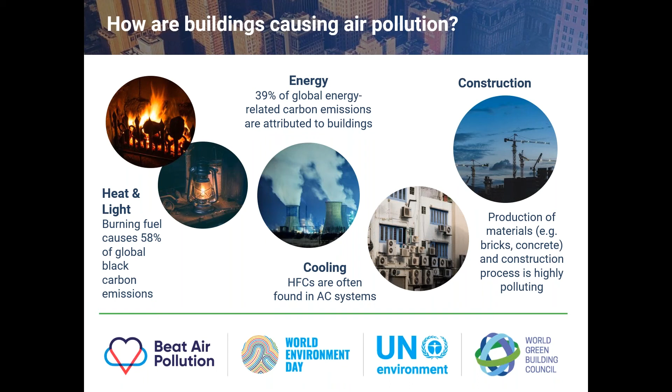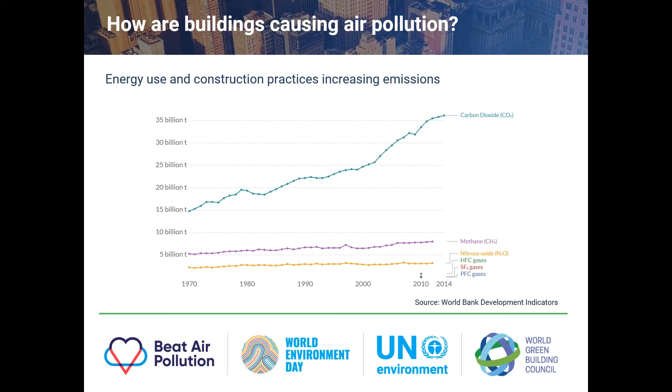Now, these are just some sources of air pollution, but the sources are causing the following effects. Firstly, increasing emissions from building energy use and construction. And the International Energy Agency have flagged that emissions from buildings are not on track to reach a reduction in emissions target, and that emissions from the sector are actually creeping to an all-time high, likely due to extremes of weather and global population growth. Secondly, this pollution has a human impact. The World Health Organization reports that 9 out of 10 of us do not breathe safe air. And as a result, this air pollution was responsible for 7 million premature deaths in 2016.

And to add to this challenge, this quote from the President and CEO of the World Resources Institute, Dr. Andrew Steer, reminds us that curbing emissions and pollution from buildings is a test that is really ever increasing. As a building lifespan is typically 50 to 100 years, what we're risking is locking in emissions for the next century with poor building design and construction today. This is obviously a particular risk in parts of the world that are experiencing massive population growth.

Now, this challenge is something that we as the World Green Building Council are looking to grow awareness of through the World Green Building Council's World Green Building Week campaign, titled Building Life, which we're launching today on World Environment Day. So taking place from the 23rd to the 29th of September this year, World Green Building Week is our annual campaign that seeks to raise awareness of green buildings as one of the effective ways to tackle sustainability issues. The campaign aims to raise greater awareness of emissions from all stages of a building's life cycle, and therefore encouraging new practices towards reducing emissions from buildings and therefore improving our air quality.

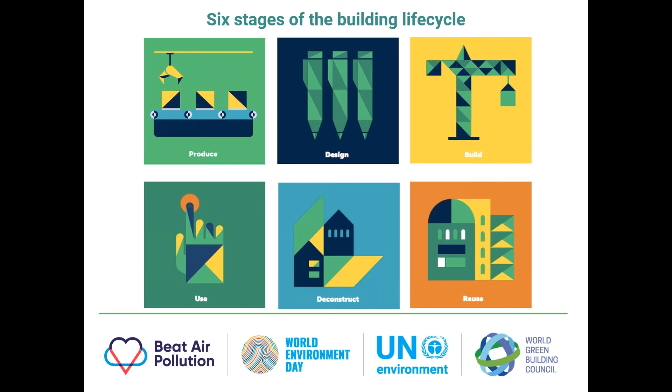The Building Life campaign is focusing on 6 areas of a building's life cycle: production, design, build, use, deconstruct and reuse. And throughout the campaign, we're going to be working closely with product manufacturers to seek out ways to source, produce and transport materials more sustainably.

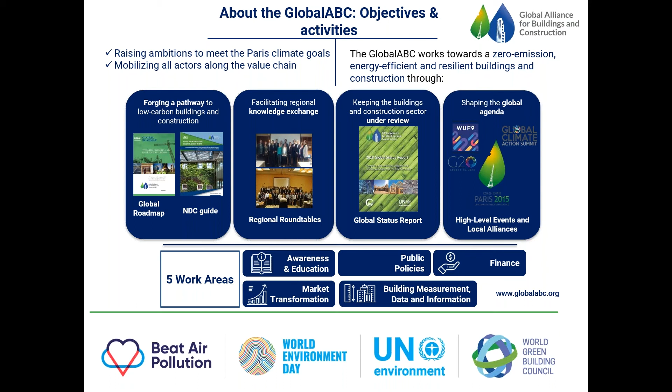In a nutshell, we work towards a zero emission, efficient and resilient buildings and construction sector through forging global and regional pathways to decarbonization, working with nationally determined contributions with countries, facilitating knowledge and best practice exchange, targeting policymakers, especially through our regional roundtables, and through keeping the sector under review with our global status report. The next one is launched at COP25, so do stay tuned, and through shaping the global agenda. We have 120 members, among which are 27 countries. If you're interested in joining, please do feel free to reach out.

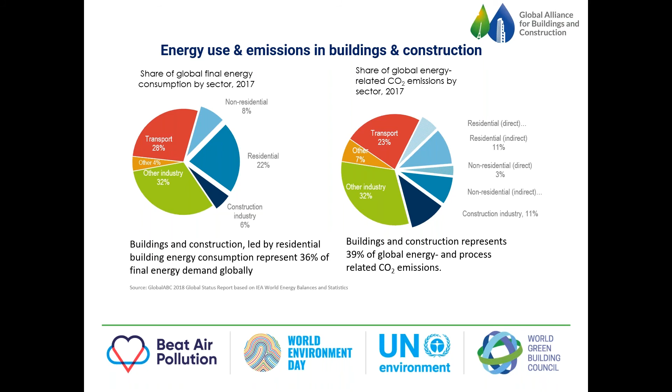As Katrina has already mentioned, the buildings and construction sector impacts are huge, and we see 36% of global final energy demand and around 39% of global energy and process-related emissions. It is estimated that it is not possible to achieve the climate agreement goals without decarbonizing this sector. And in that context, it is particularly heartening to see cities like New York taking actions of doing that.

A couple of words about the emissions profile of the city. So New York City currently is at 51.7 million tons of CO2, and the majority of which can be attributed to the buildings and construction sector, which is why it's such a particularly important sector. So we see 30% for transportation, and if we then look into buildings, fossil fuels account for around 40% and building electricity for 25%. New York City essentially has set two goals that I would like to talk to you a little bit more about.

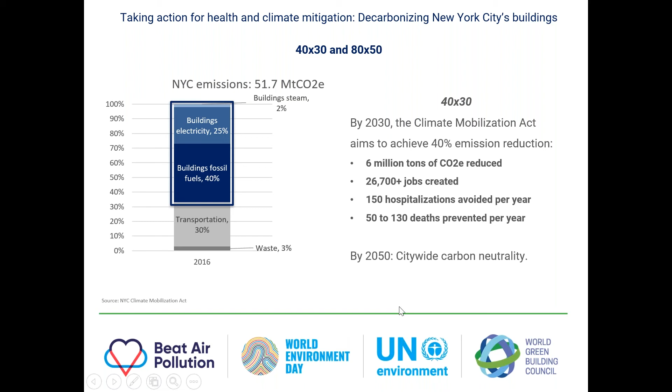We call it here 40 times 30 and 80 times 50, or 40 by 30 and 80 by 50. What is meant by that is 40% reduction by 2030 and 80% reduction by 2050. For the latter one, 80 by 50, they've actually pushed further than that now and are aiming for citywide carbon neutrality by 2050. New York City is estimating with this goal that 6 million tons of CO2 equivalent will be reduced, around 27,000 jobs created, 150 hospitalizations avoided, and around 100 deaths prevented per year. So also here, strong connections to health.

A little bit more about the measures for decarbonizing the buildings and construction sectors. I'd like to divide them into 5 pillars, but this is our assessment. This kind of division is not necessarily from the city itself. It's just to increase understandability.

Firstly, there are measures around green and solar PV roofs. So new construction and substantial renovations are required to install solar PV, green roofs, or both. Then there is also an energy efficiency grade similar to the hygiene grade.

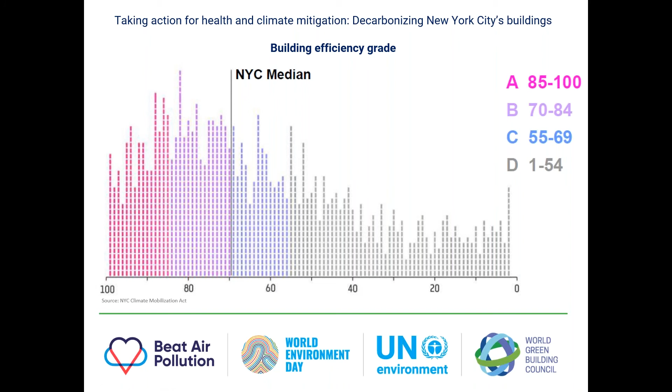For those of you who know the US and who've been to New York City, in restaurants, you see the grades between A to D, depending on how hygienic it is there. So the idea would be to do something similar for buildings. And this is what it would look like. You can see on the left side the buildings qualifying for A, and on the right side those who would be D, and that is based on the Energy Star labeling.

Another 2 pillars relate to energy efficiency loans, and New York City has included PACE financing for energy efficiency and renewable energy projects with long-term and little or no money down. This type of financing rests with the property, so the loan does not rest with the person, the individual, which decreases risk for the individual.

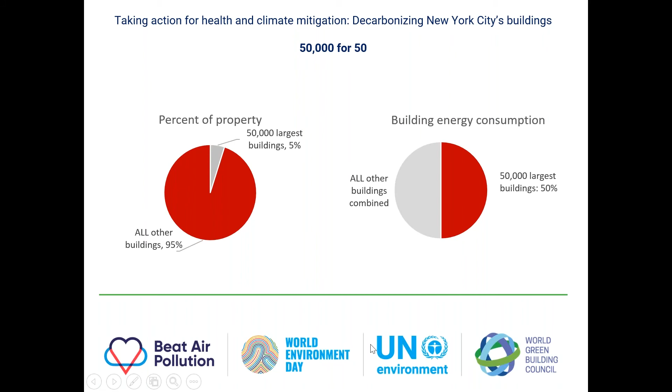And then there is a pillar that I like to call 50,000 for 50, and that targets the high emitting buildings, so the really large buildings that are larger than 25,000 square feet in size, and they must meet emission thresholds starting in 2024. So why target those buildings? I think this is a very interesting measure that New York City has taken. Those buildings only represent about 5% of properties in the city, but if you look at their energy consumption, they represent 50%. So in a way, you could say it is a hotspot approach.

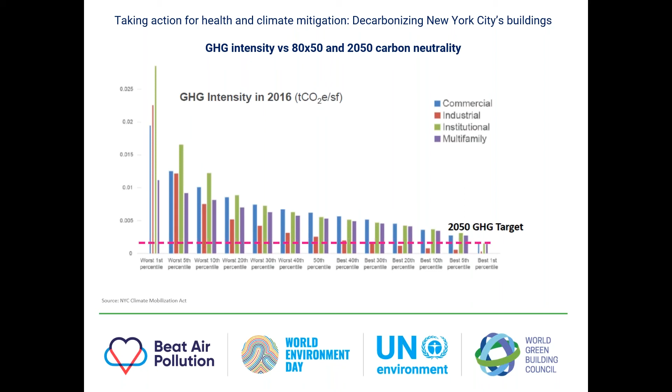This is just to give you an overview to compare the 2050 target with the current emissions intensity in 2016. And what you can see here is that currently only the very best percentile on the far right side would meet that target, which highlights the importance of setting such targets and the ambitions and the strong measures that are required.

That's a little bit also addressing the split incentive, a carbon trading scheme, city operations emission reductions of 40% by 2025 and 50% by 2030, and NYCHA properties, that's the New York City Housing Authority properties, need to meet emission reduction of 40% by 2030.

There's also a whole range of measures around a greenhouse gas emission budget approach, where architects and engineers calculate this budget and report emissions accordingly, and those buildings who exceed their budget are then fined. Affordable housing has more time to comply with this measure to ensure that any measures taken do not decrease affordability.

At the same time, there are also measures in place because it is recognized that energy efficiency is especially important for those with lower means. And those measures include things such as repairing heating system leaks, insulation, and installing and upgrading ventilation and lighting systems, as well as weatherization.

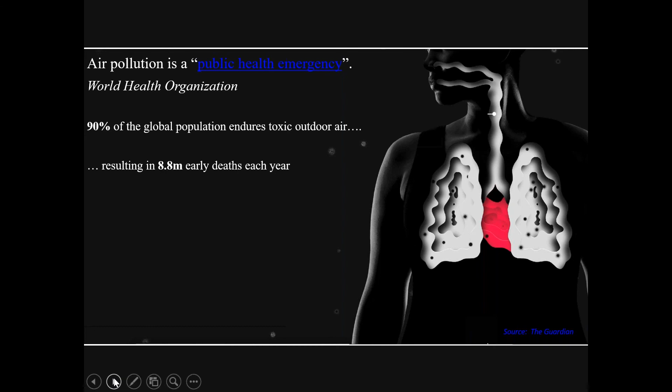Some of the stats here, just as a quick summary for the listeners, hopefully all familiar with, but 90% of the global population is exposed to some of the pollutants we're talking about today, resulting in just under 9 million early deaths each year. There's a new report, really just a summation of a number of reports that came out several weeks ago, looking at how outdoor pollutants affect pretty much every organ within the body.

And this is fairly commonsensical when we take a step back, especially when it comes to particulate matter, where, for those who are familiar with PM 2.5, these are harmful particles that enter directly into the bloodstream and then get distributed to every organ within the body. And so without going into huge depth here, just pointing out the main ones, lungs and heart being the obvious ones, leading to asthma, lung cancer, and heart disease.

Beyond that, brain and mind, leading to stroke, dementia, reduced intelligence, eye problems, skin aging, and the list goes on, pun intended. Looking at abdominal organs, there's kidney cancer, bladder cancer, diabetes, Crohn's disease, fatty liver disease. And finally, although the response here is a little bit slow, just keep moving that forward.

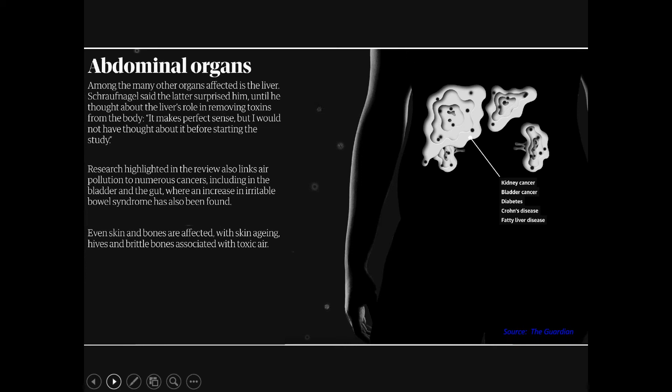Finally, looking at reproduction and the effect on babies and children, which is probably the most significant, given children are still at the development stage, and given their air to body mass ratio are by far most affected. But reduced fertility, miscarriages, and low birth weight are very, very common in places like China and India.

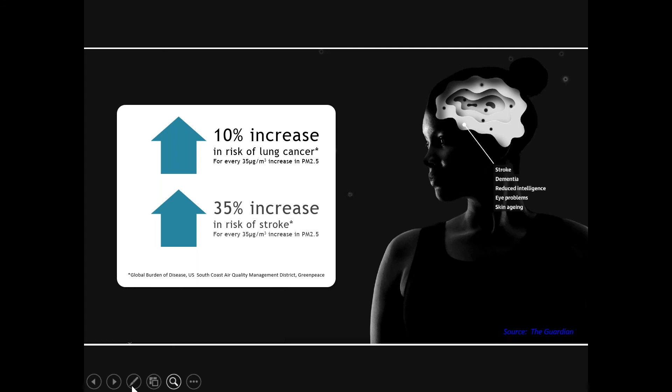And then also looking here at effects on other geographies, and highlighting the fact that these minor changes in air quality, again, because we're breathing so much air per day, minor lifts like a small change of 35 micrograms per cubic meter, which are a fairly common occurrence in cities like New York, have, again, significant impact. So 10% increase in risk of lung cancer and 35% increase in risk of stroke. These are very, very significant figures for cities such as New York.

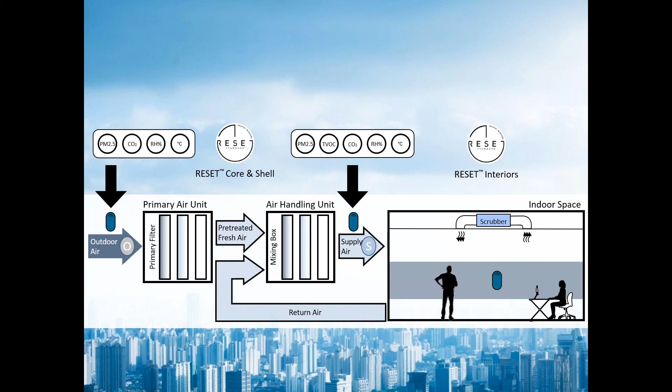Then just wrapping up and setting the stage for our two case studies. On the RESET side, the participating projects track outdoor air quality, air being delivered by mechanical systems into tenant spaces, and then finally the air being breathed by tenants. And this gives us a wealth of insights on what's actually happening within buildings as compared to outside, and the various challenges that are at play here, which is what our two case studies will be diving into. And this particular graph here is a little bit heady, but work with me.

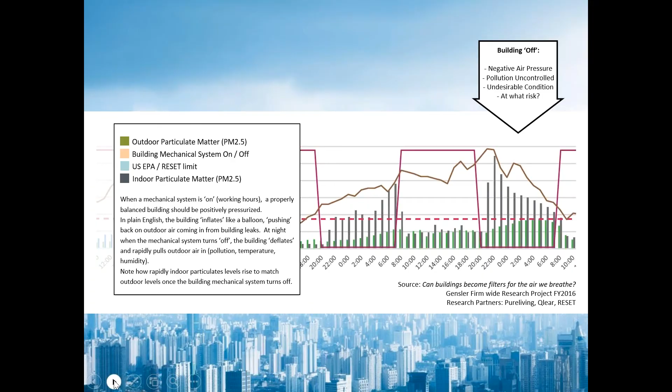So far, we talked about outdoor air pollution and ways to reduce it. But what about indoor air quality? The fact is that most of us spend about 90% of our time indoors. That's a staggering 22 hours per day. And the majority of our exposure to outside air pollution actually happens inside our buildings. So I will be focusing my talk on the 90%.

The traditional approach to maintain indoor air quality in buildings is to bring outside air to dilute indoor pollutants, such as carbon dioxide from people or formaldehyde from building furniture. However, when you bring outside air, you need to condition it, meaning that you need to spend more cooling and heating energy. In its turn, spending energy will lead to higher outdoor emissions, and you will be contaminating your building even further with outdoor pollution. This is a vicious cycle, and clearly it means that buildings should not depend on outside air as a solution to acceptable indoor air quality.

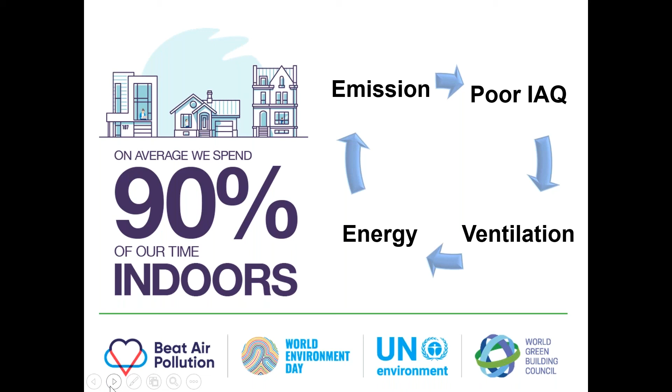Instead, buildings must adopt strategies to maintain indoor air quality and not spend more energy. Even better if they can find strategies that can maintain indoor air quality while lowering energy consumption. The solution I'm presenting here does exactly that. HVAC load reduction, or HLR, is an intelligent modular scrubber that includes sorbent materials. So during normal operation of the building, the HLR will clean a fraction of the return air from gaseous pollutants, and then it puts it back into the return air stream.

And in addition, this module is equipped with sensing capabilities to actively monitor return air quality. So as a result of cleaning return air, the building can dramatically reduce outside air requirements, therefore saving energy and keeping the pollutants generated outdoors on the outside and keeping indoor air quality below acceptable levels.

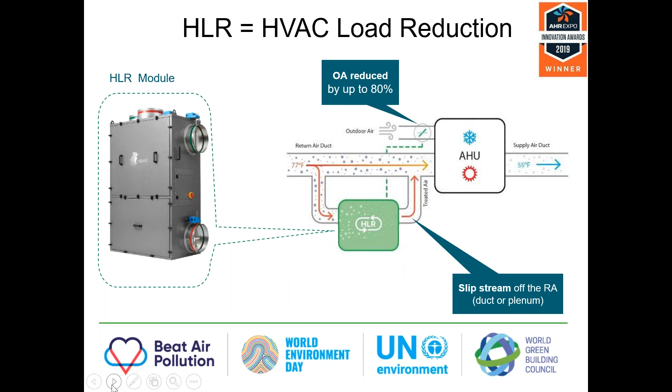So the client approached us with 2 main goals. The first goal is energy efficiency, of reducing energy emissions by 15%. The second goal, equally important, is to reduce the flow of outside air pollution indoors and actively monitor and manage the air quality inside the building.

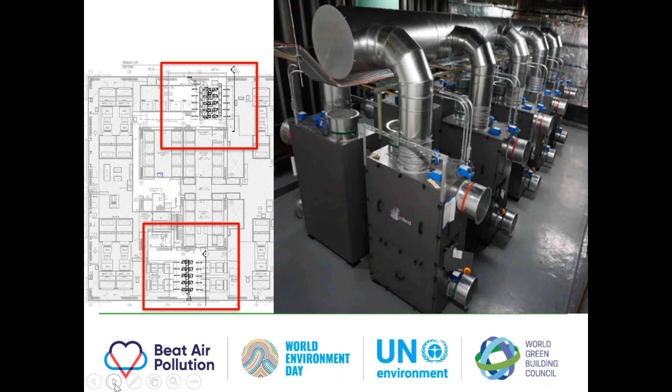So the retrofit consisted of installing 40 HLR modules in the building mechanical rooms. A slipstream, or a bypass, of return air from the plenum is drawn through the HLR modules to be cleaned before it gets distributed to the rest of the floors. The pictures I put here on the slide show an example of the installation on the 7th floor. You see a cluster of 20 HLR modules, 10 on the north and 10 on the south side. And the 28th floor has an equal number of 20 HLRs, so a total of 40 HLR modules.

These modules are connected to the building management system, and after installation, we determined the new minimum outdoor air position that we can operate the building at. And also after installation, we performed outside air quality and indoor air quality measurements, and then energy measurements to compare the building's results before and after this retrofit.

I will start with the indoor air quality results. We have here a chart showing ozone concentrations measured during August of 2018. The left axis is ozone in parts per billion, and the x-axis represents the date. The red line shows outdoor ozone concentration measured on Times Square. These concentrations were very high and reached a high value of 90 parts per billion. This is 1.3 times higher than the outdoor limit.

The blue line shows indoor ozone concentration before we did the retrofit, meaning that the building was still bringing a lot of outside air. And you can see that the blue line, indoor concentration before the retrofit, tracked very closely the outdoor concentration shown in red. Around 50% of outdoor ozone was brought inside. Think about this. This is actually pollution you introduce from the outside to the inside.

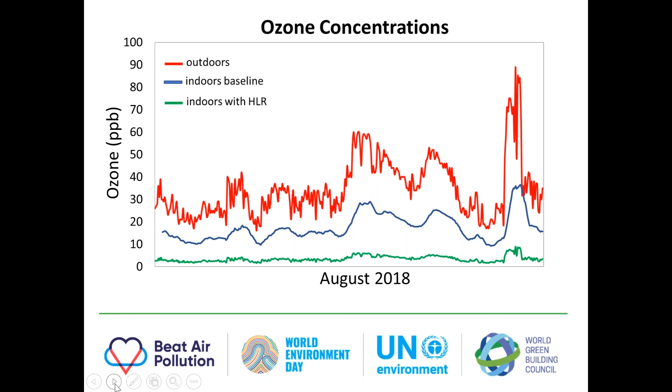Now the green line shows indoor ozone concentration after the retrofit, after we closed the outside damper to a minimum and we operated the HLRs. And you can see that the indoor ozone values were less than 10 parts per billion, and this is a major improvement over the baseline, considering that ozone is one of the pollutants, similar to particulate matter that Rafer mentioned, that has no indoor limit. The lower, the better.

So moving to the energy results. By making this retrofit and installing the HLR modules, we reduced outside air 80%. As a result, the building saved 500 megawatt hours of cooling and dehumidification of the outside air, and 4,700 million BTUs for heating the outside air. This led to $413,000 savings in utility bills, including $10,000 in steam energy bill, basically. Also, the building obtained very healthy rebates from Con Edison. And by reducing the conditioning of outside air, the building saved a remarkable 1,361 metric tons of carbon dioxide.

This is my last slide. I put a headline from the New York Times, published in April 2019. I know Nora talked in detail about the Climate Mobilization Act. I want to put it again and say that New York City became the first city in the world to constrain large building emissions through hard limits. People are saying that this bill is similar to the Green New Deal for New York, and it will be the largest disruption in the history of New York City real estate.

So buildings need to do deep energy retrofits, and if the owner is not in compliance, they need to pay a fine, and it will be an ongoing fine based on their actual emissions versus the cap. So to put things into perspective, the Bank of America Tower, located on Bryant Park, which was actually the first building to achieve Platinum LEED certification in New York, will need to pay $2.5 million in fines in 2024 if they don't reduce their emissions. With that, thank you so much.

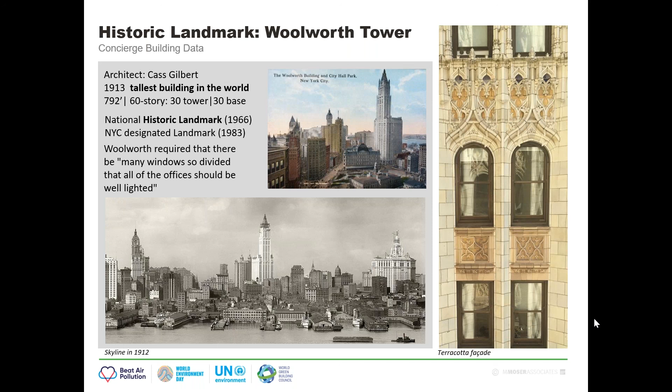their natural daylight. Are we moving forward here, the slides? There we go.

And you can actually see in these pictures here, we're revitalizing this historic Woolworth Tower. We were able to take advantage of that opportunity to have light by using daylight controls and reducing energy use through maximizing the natural light that comes into the space. And there are many ways that we did this, but sensors is one way that we reduced energy load.

And we're going to be talking more about this at the end of this talk, but by reducing our energy load in multiple ways through our design integration, we can make a big difference, which not only saves money, but also really can help the air and the carbon outside in New York City.

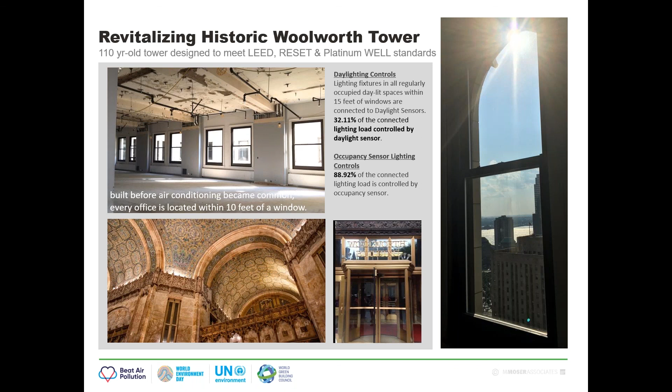So beyond revitalizing, there has been a lot of redevelopment work on the Woolworth building. And we won't go into all of the details because it's been going on for over 100 years. But as a landmark building, New York City has mandated several things which have taken care to preserve the character of this building. And those are combined with the policies that Nora shared.

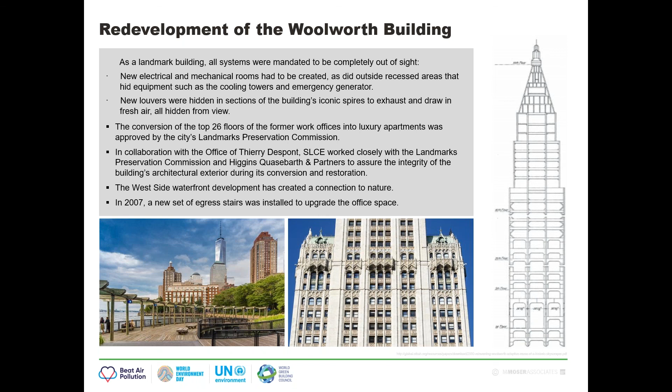These are really working to preserve the city of New York. And it insisted that no matter what upgrades were done for health and safety, they be done in a way that was hidden and would not impact the look.

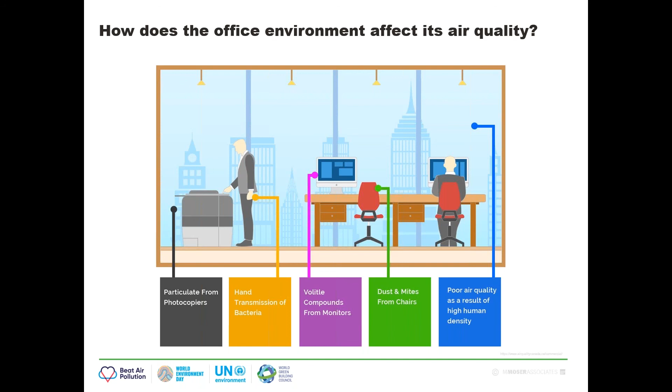We've talked a bit about this already with Rafer and with Marwa, but how does the office environment affect air quality? There are multiple ways. The particulates from photocopiers, the volatile compounds and the formaldehyde, the dust, the mites, the mold. There are many things that are out there that a building gets to work with.

So what we've done is we've actually monitored this. And similar to the example that Mara was sharing, we have set this up so that we know minute by minute what is happening with the air quality. And that's on the inside. This is important so that you can see how you're standing and make sure that you are presenting a healthy

environment. By simply adding more filters and making sure that we use healthy materials, healthy cleaning programs and processes, we were able to ensure that PM 2.5, TVOCs, which is the total volatile organic compounds, those rates all stayed well below what you can see as a blue line, which relates to Reset and WELL standards. Far below them is where we want to be for health.

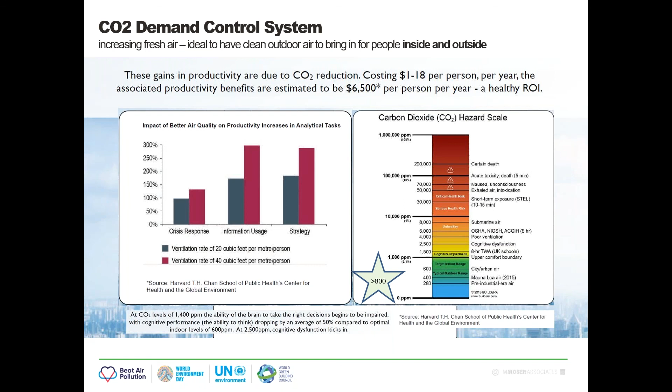Again, for CO2, we really want to make sure that people have enough fresh oxygen and air. This is important inside, and also by reducing the energy use, we can help to make sure that the air outside will also be clearer.

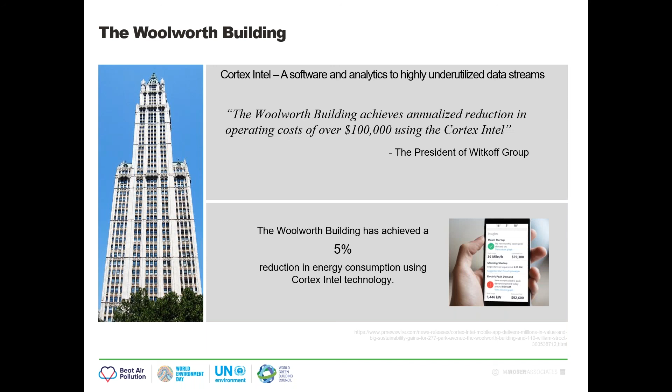There are certain other softwares and analytics that were utilized by the building itself to help to further ensure reduction in energy. So we have to be working at the building scale and at the tenant scale.

If we go to the tenant scale, one thing that you can do that's quite straightforward is the incorporation of green walls. And these green walls are actually called the Naava walls, and they work as an air purifier. They are actually helping to create a healthier environment. They're taking care of your air.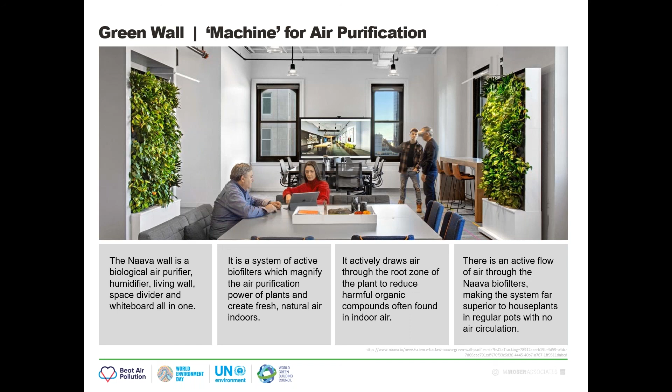They're pulling air right through the roots of the plants, improving the space that you're in, but they're doing many other things simultaneously. They're creating a very healthy environment. They're creating an inspiring biophilia, and they're working together with the design.

You can see here that we actually have designed this space to be very fluid, again, to take advantage of the natural daylight, the high ceilings, and these walls can move around. We reconfigure them frequently. All of these pieces can move so that we can clean very regularly, again, with natural and green materials, so that the air quality is staying healthy.

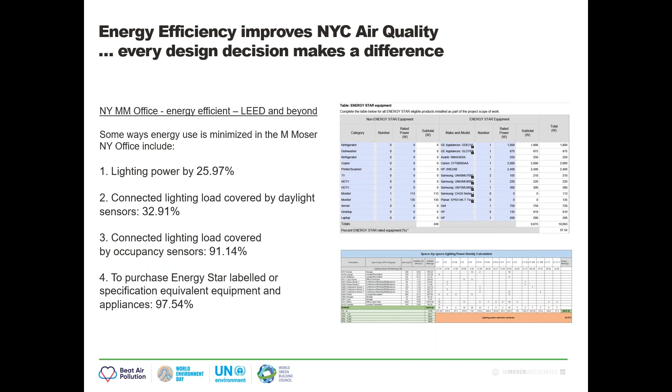But how does this affect New York City's exterior air quality? And I'll go back to that simple point. By being energy efficient, we can all make a difference to the exterior air quality. And certainly those projects that are working towards LEED, that are following other best practices, will see that you've reduced your energy loads. This is a few examples of what's happening in the New York M Moser office. And the reduction numbers are printed there. You can see every detail, every specification has to be considered.

And this is, again, not just about saving money. This is about truly creating a responsible environment, a healthy place to work in, reducing operational costs, reducing energy costs, but improving employees' well-being, mental well-being, and ultimately including the surrounding outdoor air quality.

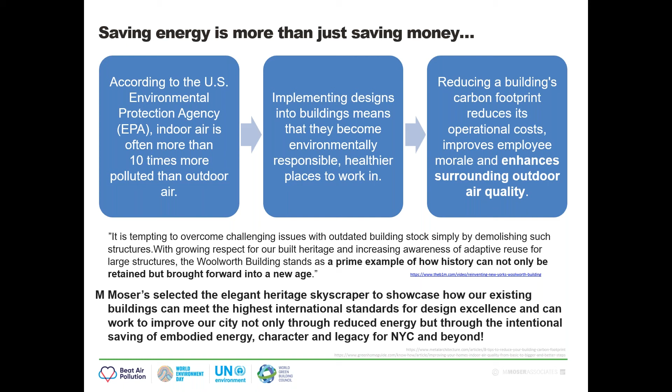And it's important, you can see in this quote that the Woolworth building itself is a prime example of how we can use existing buildings, taking an old building and showing that you can create state-of-the-art platinum WELL spaces within them. And in fact, M Moser selected this heritage skyscraper to truly show this and to show how important that character is and how important it is that we look at all existing buildings and improve them dramatically through the way that we specify the interiors, the way that we work together to reduce embodied energy and save the legacy of New York.

Thank you, Christine. I think everyone will agree that you give such a unique and interesting perspective to hear, for a change, from the occupier of a building, as well as the designer bringing in these amazing health and well-being and environmentally positive design principles. And we'll look forward to hearing more from you shortly.